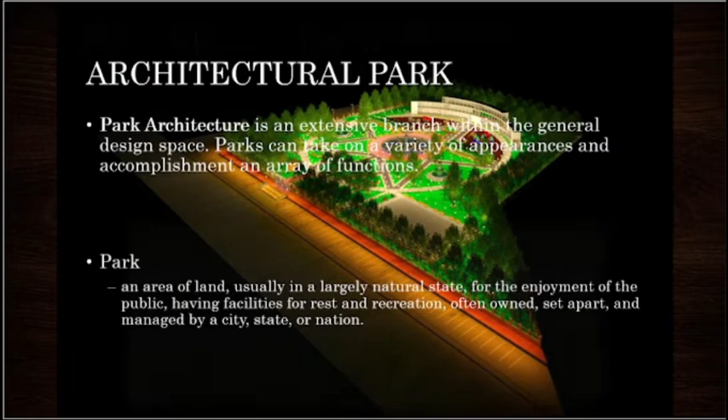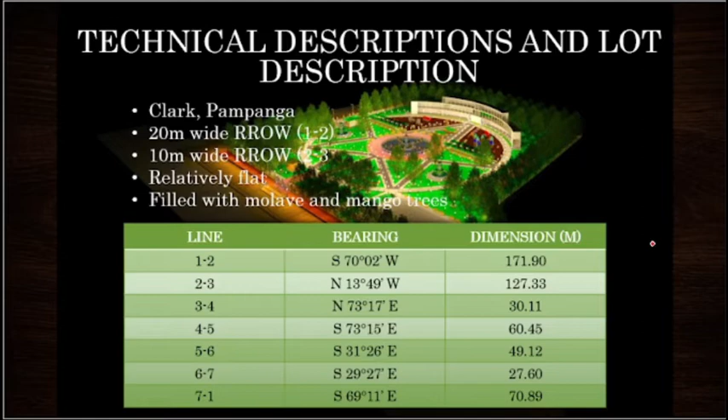So these are the technical descriptions of the lot. The lot is located in Clark, Pampanga, having a 20-meter wide main road and a minor road of 10 meters. The lot is relatively flat and is filled with molave and mango trees. These are the bearings and dimensions, the process.

So before I started designing, I gathered all the necessary information that I could be using. And this is what I found: the Clark International Airport, Ligligan Parul or the Lantern Festival, Sizzling Sisig dish, Fiestang Tugak, pottery, fishery, and the weather.

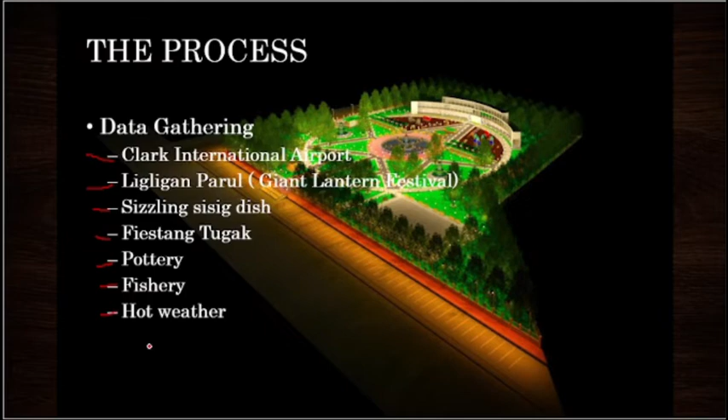So this is the airport. Since this is the most known in Clark, Pampanga, the Clark International Airport, this is what I used as the main core of the park.

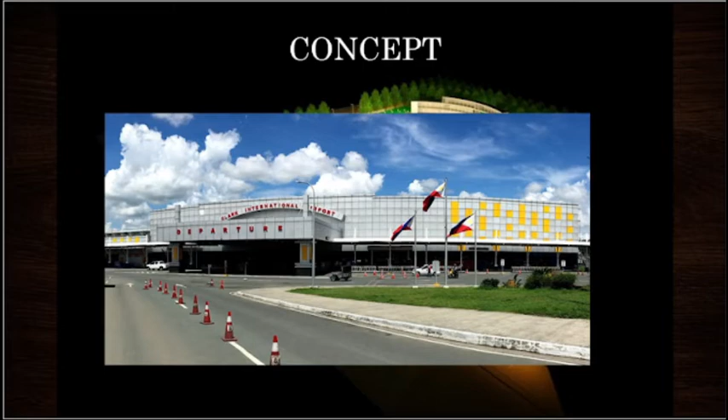Next, the Parol or the Lantern Festival. I came up with this idea, this plan, to make the shape of a star as a pathway in the park, having round elements symbolizing unity and bond between everyone.

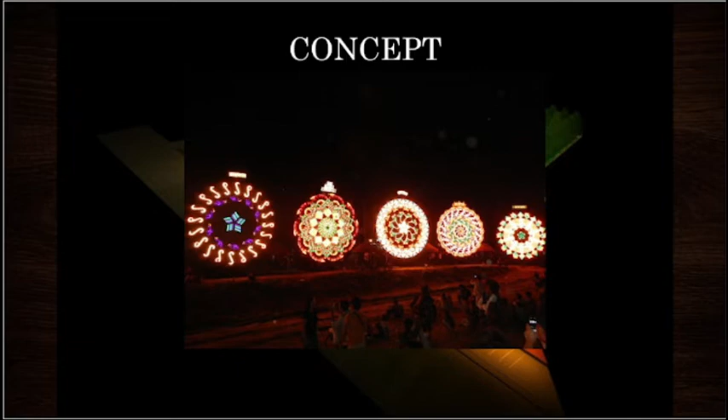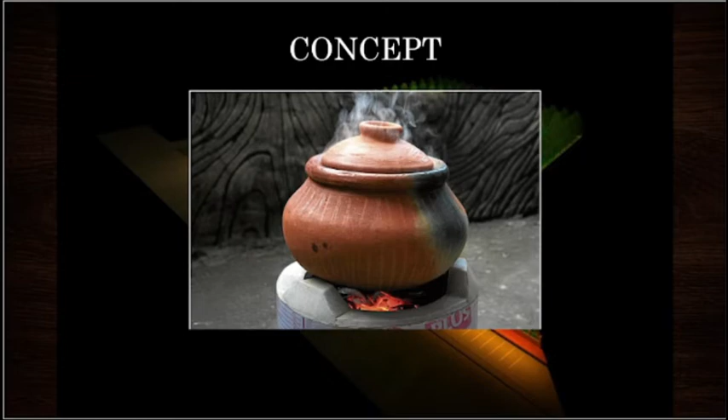Fishery is one of their livelihoods, so a pond is one of the main cores in the design. A pot or jar is not only used for cooking food but also for storing water, and it is used in the design as an element in the pond.

So this is the overall plan, the outcome of the mixture of the different design concepts. The park is elevated 60 centimeters from the natural ground line to avoid flooding in the area once it rains.

Some of the trees scattered around the site were moved to preserve them. The design forms a star shape which guides people, just like what a star is - it shines at night and serves as a guide. The star has a round pathway connecting every pathway, which symbolizes unity between everybody and the bond.

At the side of the main road, you can see a pathway shaped as the letter V, which symbolizes the feet of the frog. On top of that portion is a semicircle building which is a view deck.

The concept is derived from the airport building, where the walls are glass so you can see the airplanes land and go. Same as this view deck, but it also serves as an area where you can take pictures from high up, and at the same time see your children playing on the ground.

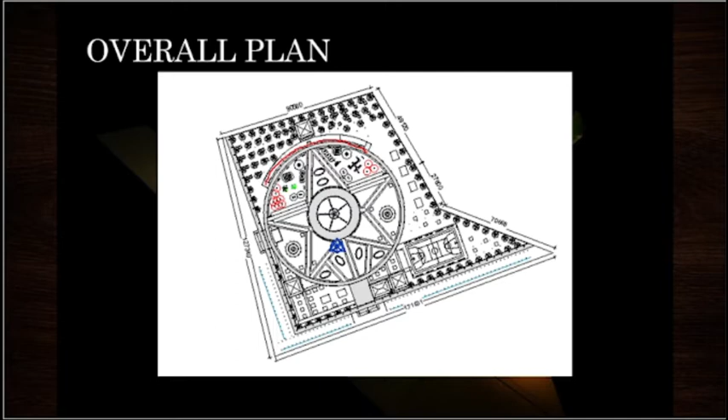The front of the minimum setback was widened and has been utilized as parking, also having a PWD parking near the entry point so they won't need to walk far.

Beside the stairs is a bike rack where you may lock your bikes for the purpose of security.

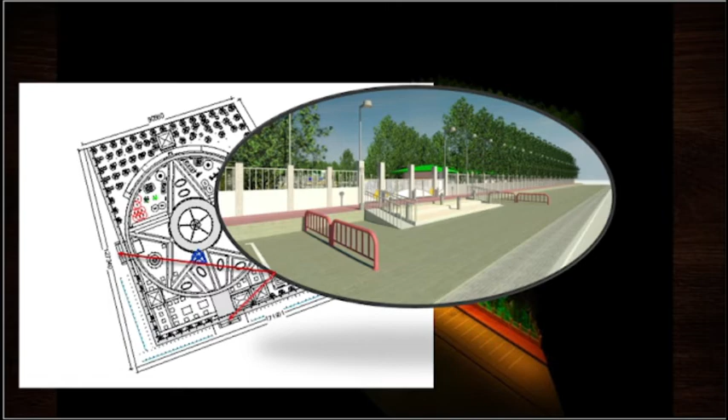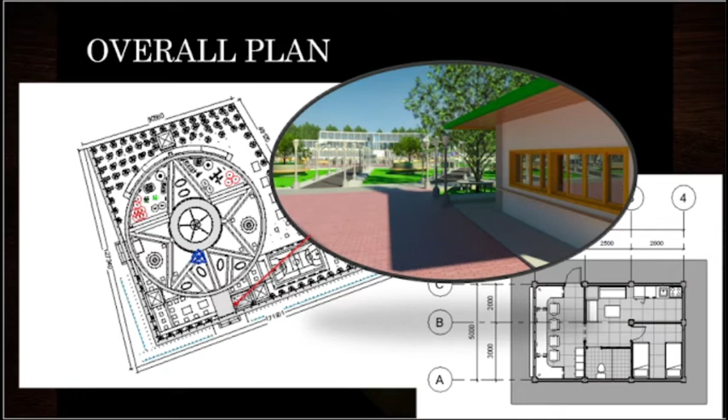Upon entering the park, the first thing you would see is the guardhouse or information area. This building has the information area, living area, kitchenette, toilet and bath, and bedroom for the guards.

Overall, the park has three restrooms situated in areas accessible anywhere in the park. This is important because not only do adults always use the restroom, but there are a lot of kids in the area, so restrooms should be accessible in every area.

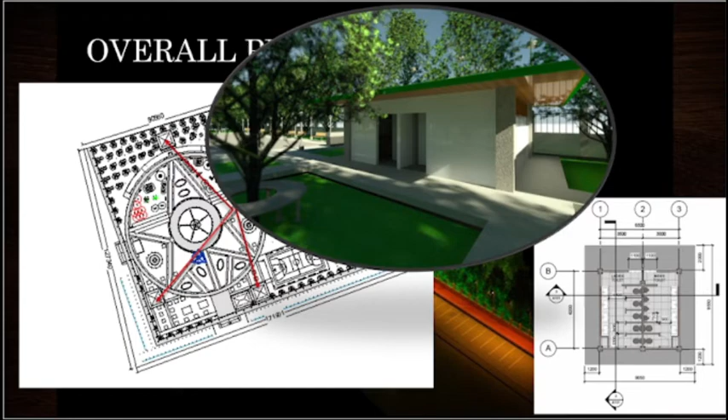A basketball court was incorporated in the design as this sport is what Filipinos like the most. This is to give space for adults also, not only for kids to play, since this park is for everybody.

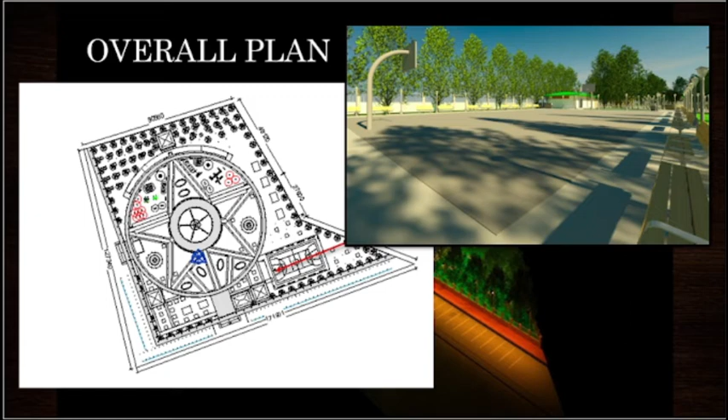This pergola has three benches inside and lighting in the front. It also has added protection, which is glass shading, especially when it rains.

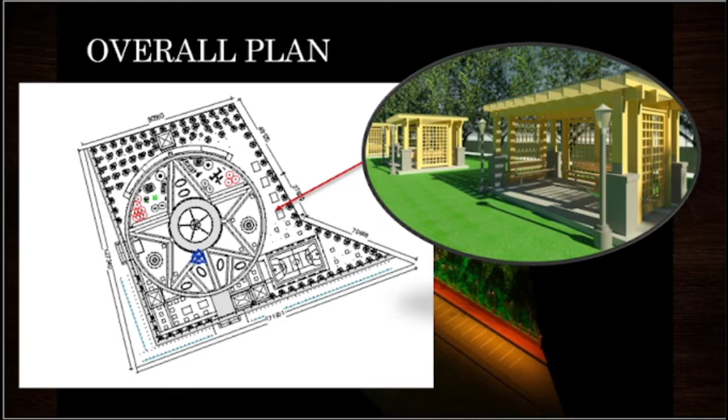So this is the main core of the park, the very center and highlight of the park. It is a round fountain with a spacious walkway around it so it can accommodate a lot of people. It has a glass barrier and bollard lighting around it so it shines at night.

As you can see, the fountain is a series of jars directing towards the center, forming the shape of a star. Those jars represent the countries the airplanes travel to, which is why there is distance between each other.

But at the same time, there is a slab that connects them together, representing the relationship and the path that wherever you go, you would always go back to the place where you came from or belong, and you will never get lost. It also represents unity with each other.

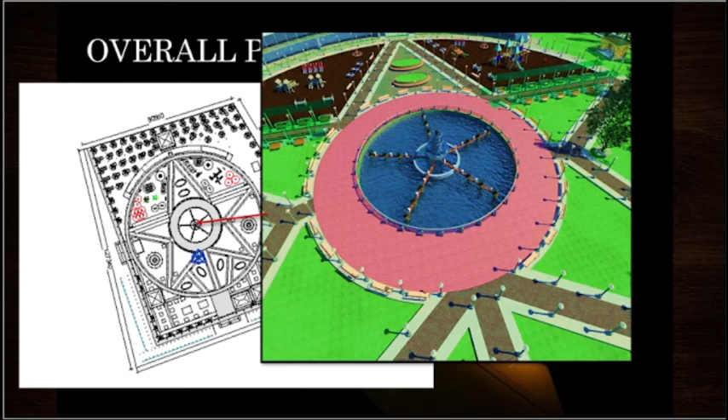This slab now directs to the very center, which is a fountain and a jar at the top, wherein if you are there at the very top of the center fountain, what you see around you is water, just as when you are in an airplane.

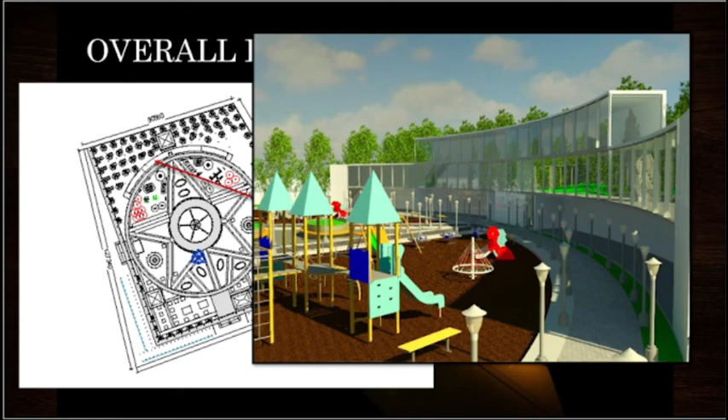So this is the view deck, which has glass walls enabling you to have an overlooking view of the whole park. This is the plan - second floor plan, and the third.

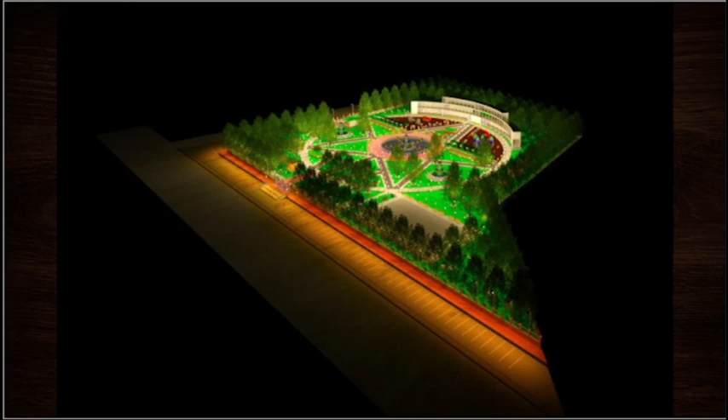This is the overall view at night. It is important that it has enough lighting to appreciate the beauty of the park, not only in daytime but also at nighttime.

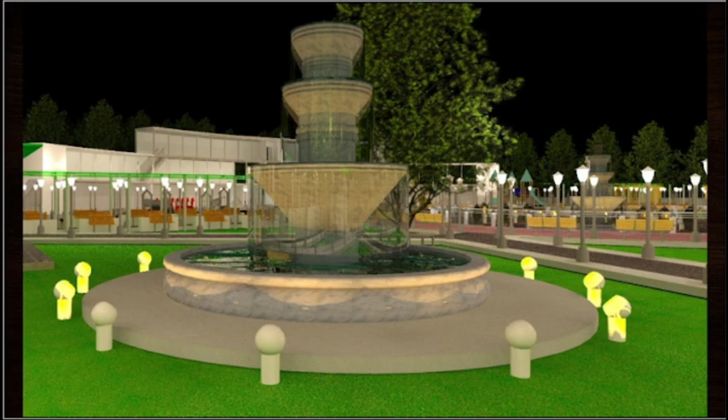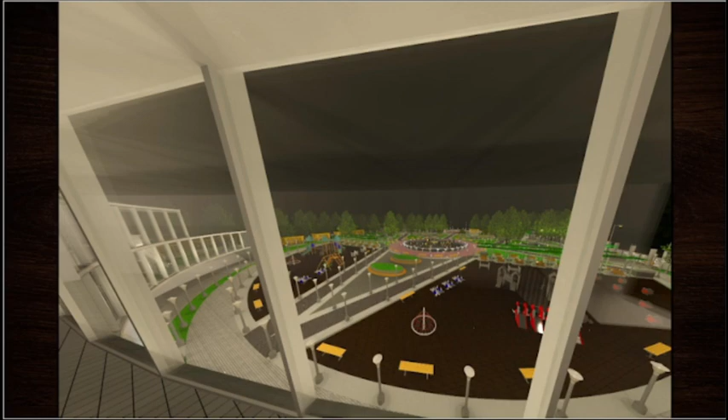This is one of the fountains in the park. This is part of the pathway where there is a bench and shading. This is the view if you are in the view deck.